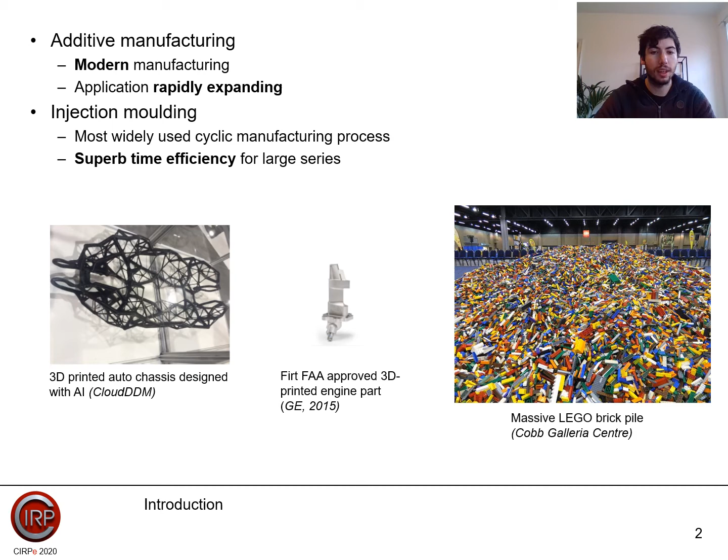However, in the context of flexible mass customization, where often small series production is envisaged, both the typical lead times and the costs associated with producing a tool steel mold hamper the economic viability of injection molding. In this context, the application of additive manufacturing for the production of plastic mold inserts for injection molding can prove to be a cost-efficient alternative.

However, to integrate such additive manufacturing inserts into the injection molding process, their mechanical reliability with respect to the thermo-mechanical loading has to be fully understood to ensure final part quality, process reliability, and minimize the number of service intervals. To give a brief impression, you note the difference in Young's modulus of polymers and alloys on this logarithmic scale, which clearly indicates that the range of materials that are applicable for most additive manufacturing methods, although quickly expanding, is not on par with conventional methods for injection molding tools.

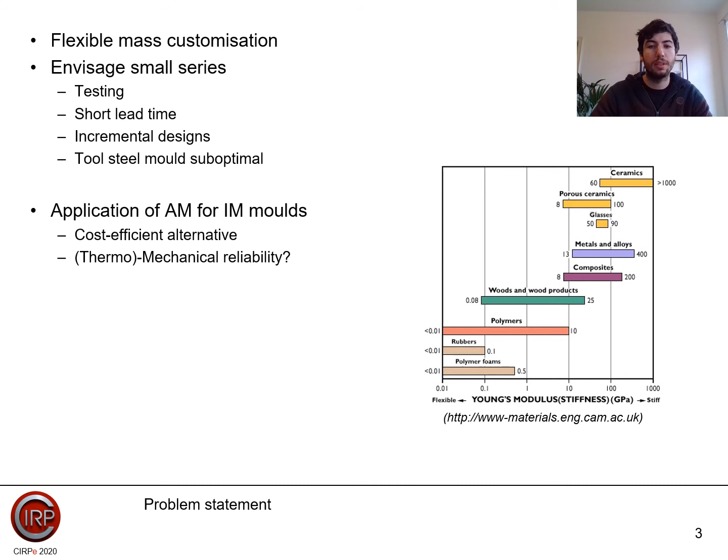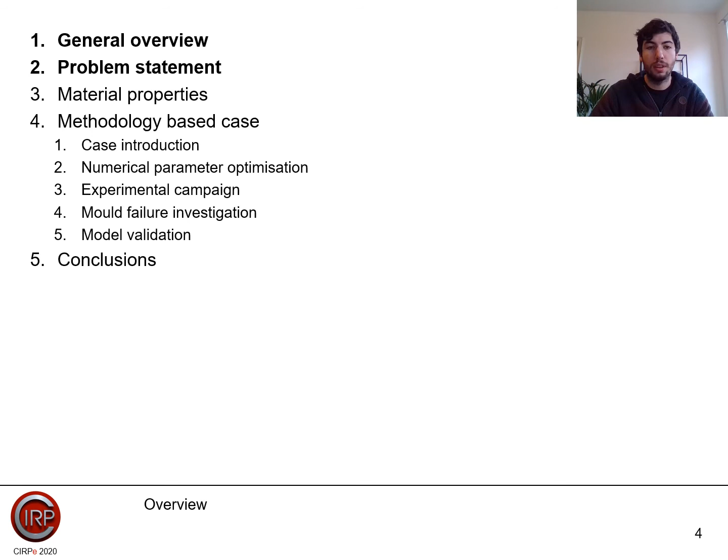Before continuing, let me give a brief overview of how this presentation is organized. I've given a general overview to situate this work, where we also saw the problem. So we will now have a look at two tests to assess thermal properties. Next, we will have a look at a case study, which I will use graphically to explain together with you the proposed methodology. More details on that later. And finally, the conclusions.

First of all, material tests. Why did we do this? Several thermo-mechanical material parameters that have a large impact on the quality of an injection molding mold produced in digital ABS, and hence the performance of the injection molding process, are insufficiently quantified. The rather high thermal expansion coefficient, the low thermal conductivity, and the low glass transition temperature of the digital ABS cause risks of premature failure due to the thermal load induced by the injected polymer melt. Therefore, establishing these parameters is a fundamental prerequisite to obtain a robust production process, as well as developing truthful numerical models.

Differential scanning calorimetry (DSC) analysis is used to assess the thermal capacity and an interval for the heat deflection temperature within the range of 0 to 200 degrees Celsius. Thermo-mechanical analysis (TMA) is used to determine the thermal expansion. More info regarding these tests is written in the paper.

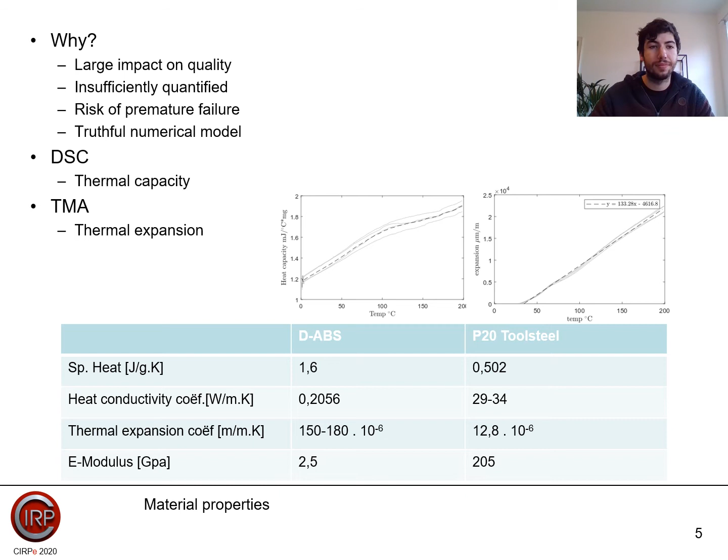In previous work, we already hypothesized that the shear rates induced by the plastic melt that is being injected are the key factor determining the failure of the plastic additive manufactured insert. This hypothesis was based on the observation that the mold consistently failed at locations where the highest shear rate occurred during the injection molding process.

Furthermore, it is expected that the lack of thermal conductivity of the material causes large temperature variations within the mold during each shot, inducing thermal stresses in the material. These effects, in combination with a relatively low yield strength of typically used materials, can cause failure of the insert after a low number of cycles, mostly less than 100. Nonetheless, these effects should be fully understood to ensure the reliability of the mold inserts. This paper therefore studies the dependence of shear stresses and temperatures during the injection molding process on the functional life of the mold. Here I've illustrated the design of our case.

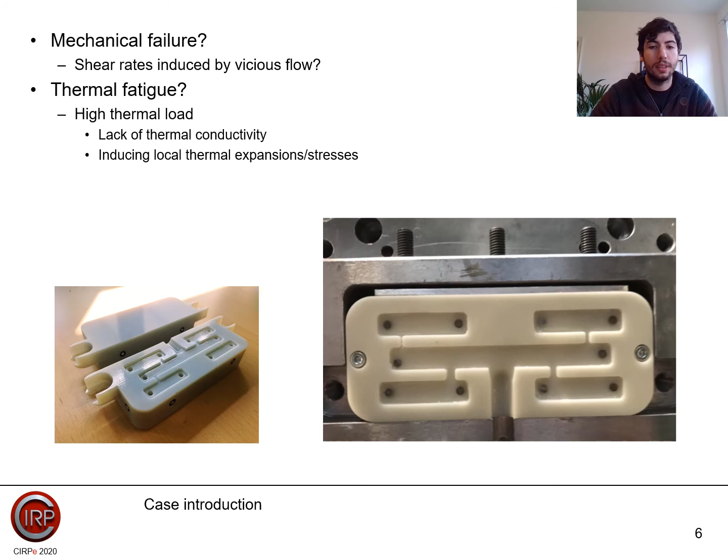As you can see on the right, we use a base mold and we only print the insert, which is illustrated on the left. By doing this, we save a lot of material, but we are restricted to the available space in the inserts. Let us take a closer look at the selection of this case. It results in a design consisting of 4 cavities with the same volume, but with different injection gate widths, ranging from 1 mm to 4 mm. To ensure an equal thermal stress during injection, the model is kept as symmetric as possible.

The optimal cavity size and corresponding gate positions, as well as the optimal injection parameters, are found by means of numerical optimization based on a finite element model. The illustration on this slide stems from that model, indicating the maximal shear rate, which we can clearly see is inversely proportional to the gate size.

In the design optimization, the cost function represents the difference in fill time, which is minimized. As such, the thermal loading of the mold material in each cavity should be equal, as the same heat exposure time is ensured. Note that the latter does not include the incoming flow. Also note that the sprue is still steel, and thus there is a large transition in thermal behavior where the flow enters the inserts.

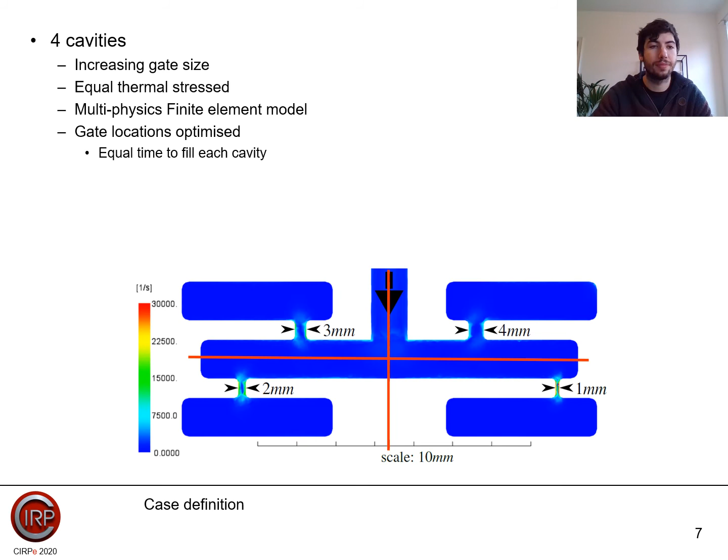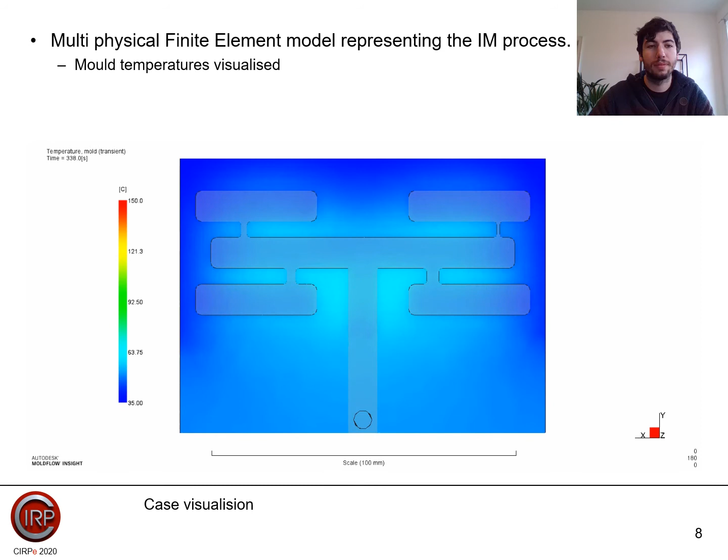The injection molding parameters, such as cooling between shots, injection pressure, temperatures, and hold pressure, that have to be used in combination with plastic molds, differ significantly from conventional injection molding due to the vast difference in properties. This is illustrated by choosing one variable, thermal conductivity.

Phi, the heat flux, is equal to the coefficient of thermal conductivity, in this case either 30 or 0.20, multiplied by the area of contact and the difference in temperature. The heat flux, upper temperature, and area of contact are assumed constant, so the difference in coefficient will make the temperature through the wall much higher.

This will cause the frozen layer to grow slower, making it possible to inject at lower flow rate, which will result in lower shear forces. The point here is that the process parameters differ substantially from conventional injection molding. The illustration provides some information on the optimization process. The goal is to lower the injection pressure, and thus shear rates correlate to the latter.

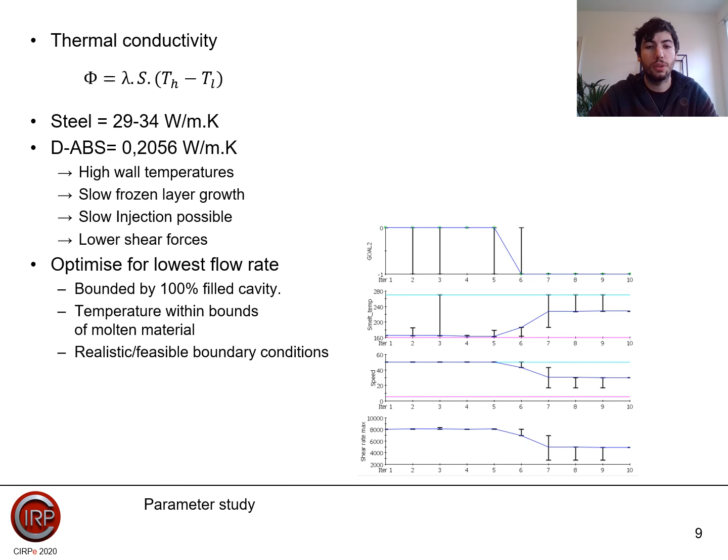The process also has a boundary condition that the cavity should be completely filled, temperatures should be within the range of the material, and gradients of sudden velocity, etc. should remain feasible for the selected machine. The hypothesis that shear stresses and thermal loads are responsible for premature mold failure is validated according to a well-monitored experimental campaign, based on the optimized design.

Specifically, it is expected that in case first failure of the molds occurs in the 1 mm gate, shear rates are the predominant factor, since the highest shear rates occur at that place during the injection molding. The experimental campaign is both aimed at validating the proposed parameters as well as assessing the functional lifetime of the mold. The state of the mold and the temperatures are closely monitored between the consecutive shots.

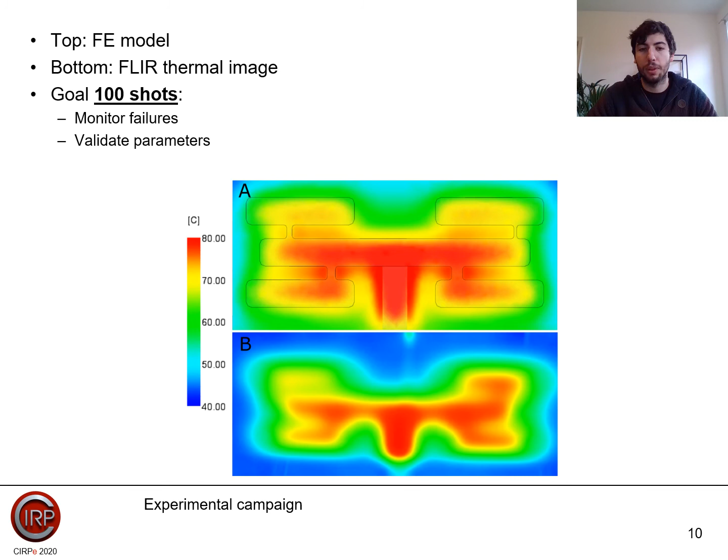Due to the previously elaborated material tests, we were able to construct a model that is able to predict the temperatures quite well, which can be seen by the comparison of the thermal distribution in both the experiment and the finite element model. After the benchmark of 100 shots, the mold degradation is already noticeable.

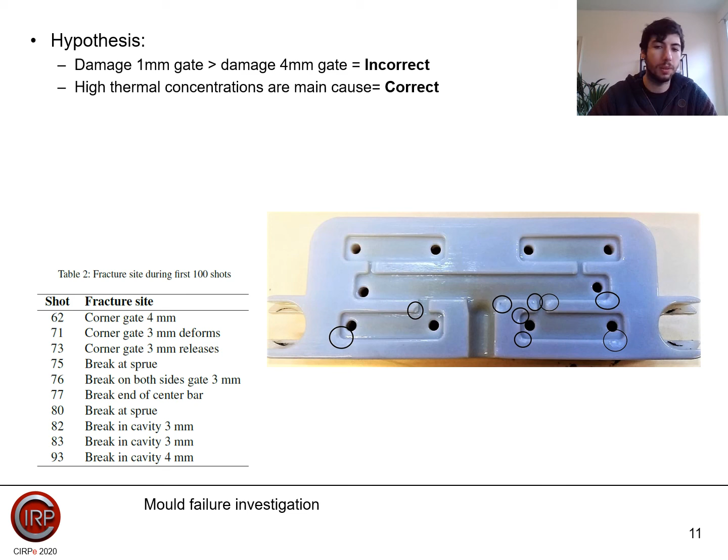Actually, the occurring high temperature concentrations are the main cause of the early failure in the mold in these gates, which is most probably due to a combination of thermal expansion and degradation of the digital ABS material. Finally, our conclusions of this work.

Injection molding with additive manufactured plastic molds has a large potential in the context of flexible mass customization, as it can combine the strengths of conventional injection molding in terms of production throughput with the flexibility of additive manufacturing techniques. Most commonly, plastic inserts for steel molds are produced, yielding hybrid molds. However, the thermo-mechanical behavior and the functional lifetime of these mold inserts is insufficiently understood in literature to allow for full industrial uptake.

Mostly, their robustness with respect to the occurring shear rates and thermal loads remains an open question. Therefore, in this paper, a case study is defined and optimized to have predefined occurring shear loadings at different sections in the mold insert. This case study consists of a design with 4 cavities with varying widths of the gates in combination with numerically optimized injection molding process parameters.

An experimental test campaign consisting of 100 shots in combination with this design reveals that in fact temperature concentrations are the main cause of failure, possibly combined with high local stress concentrations inside the mold due to large temperature variations. Using numerically optimized parameters as a prior setting, the lifetime of the mold in digital ABS was higher than predicted. Yet, the parameters required small adjustments during the experiments to achieve the final product.